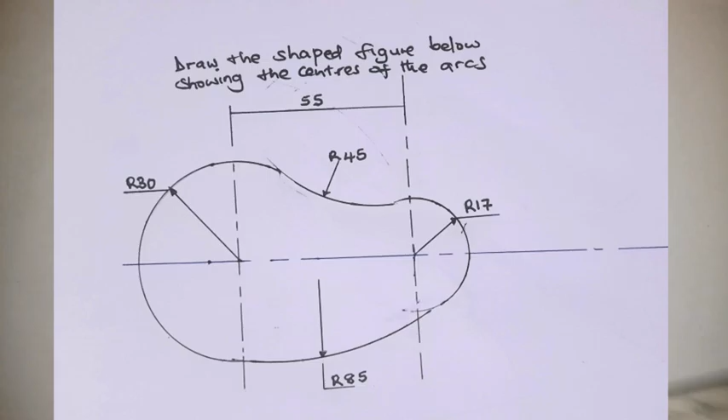So let's proceed. Let's have our center line, and from this center line we can establish our center point. Let's say this is my center point, and at that point we can draw the first semicircle. Before that, we have the vertical center line at the point where we want to put our center for the first semicircle. Let it pass through there. So the first one is there.

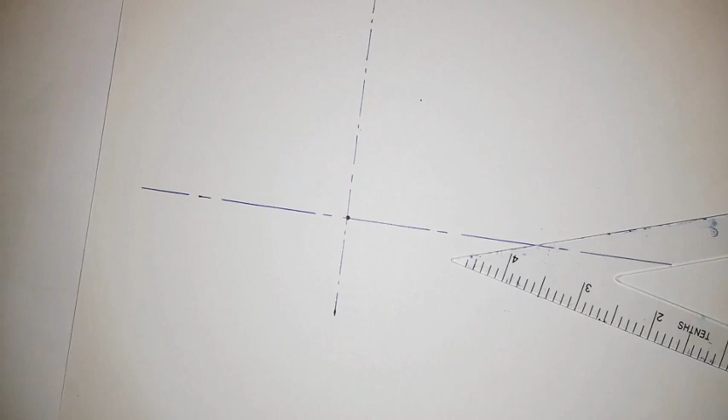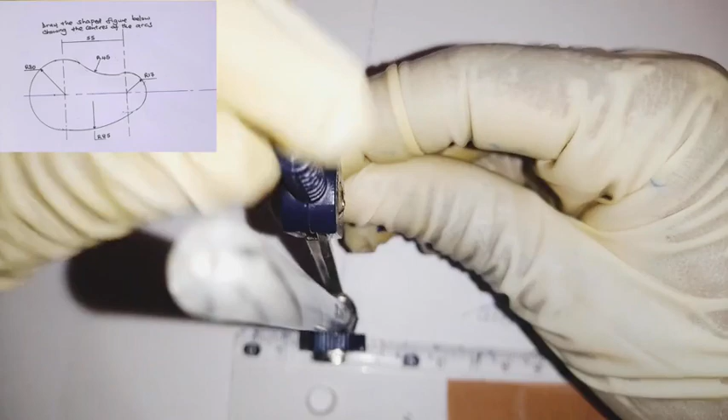Next we draw that semicircle whose radius is 30. We measure 30, and draw that semicircle so it can pass through the center line just a little bit.

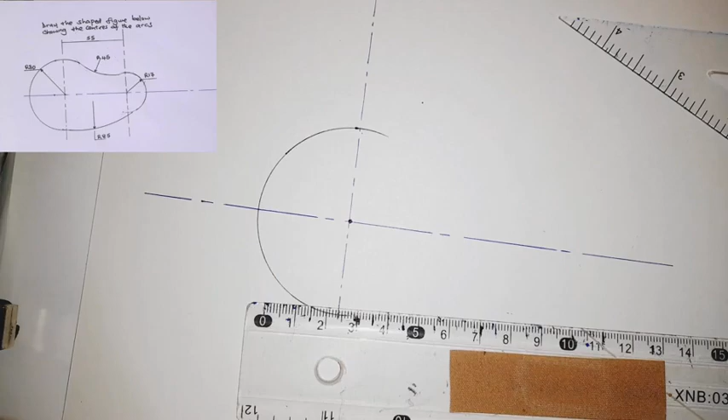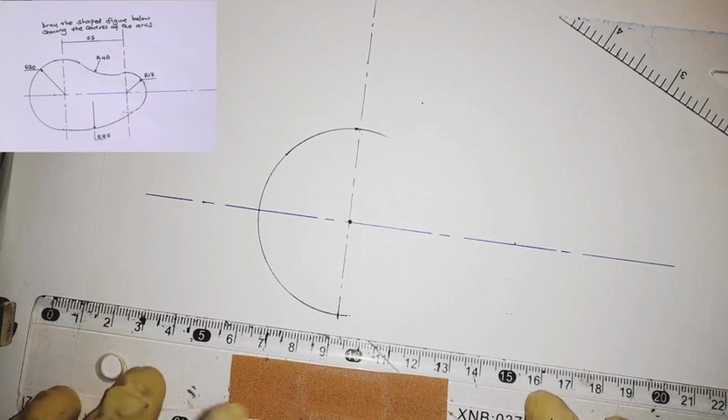Next we establish the center point for the second semicircle, which is at 55 millimeters away from this center, as given in the question. So we measure 55 from this center. At that point again we can have our center line. The distance between the two centers is 55, so we can have another one here.

Now once we have that, we can draw that semicircle whose radius is 17. Measure 17, and draw it.

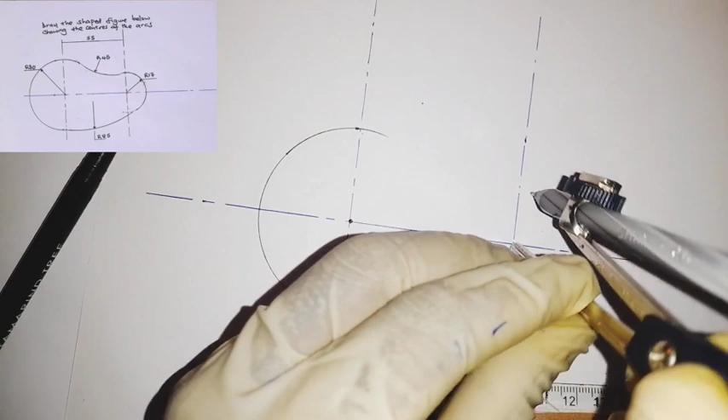There we are. The next thing is to identify the arcs that are going to touch these two semicircles, which one is external and which one is internal. Once we know that, we can apply the addition and subtraction principle. Let's look.

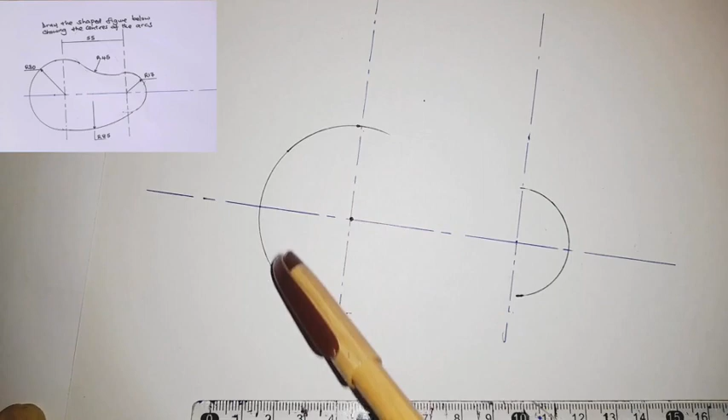This semicircle here is part of a circle, this one and this one. Let's assume you complete them so each is a full circle, and another one here. If we have another bigger circle whose circumference touches the two, it means all three circles touch each other externally. So this arc is an external arc.

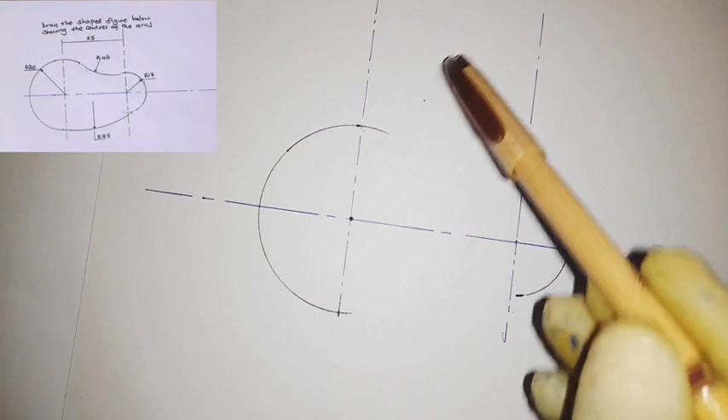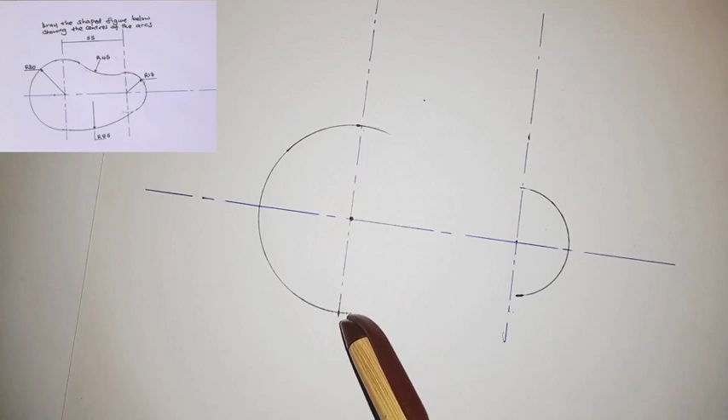Now let's assume again we complete this circle and this circle. We have another arc here with radius 85, which is bigger than the other two. If we complete these and have another circle with a larger radius touching the two circles in that manner, it means they're all touching internally, and therefore this arc becomes an internal arc. So how do we draw it?

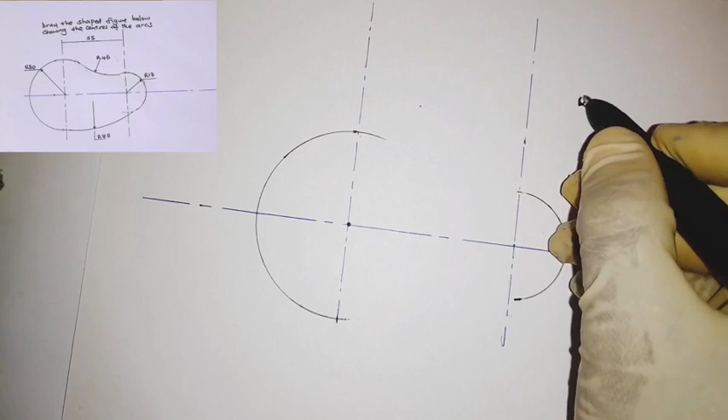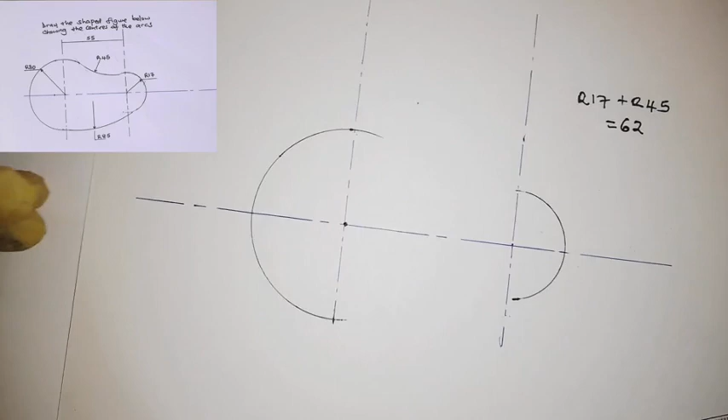First we start with the one touching externally. For the external arc, we add the radii, using the principle of addition. So we take radius 17 for the smaller one, plus radius 45. Radius 45 plus radius 17 gives us the answer 62. We take 62 from our measuring instruments.

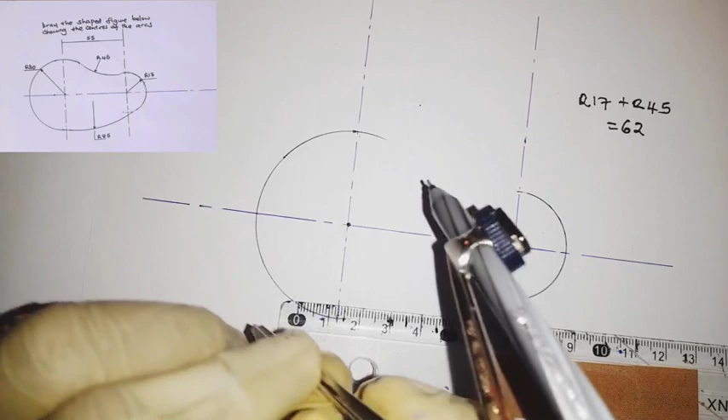Once you have your 62, come with it at that center and make an arc up here. We want to determine the center for that particular radius arc.

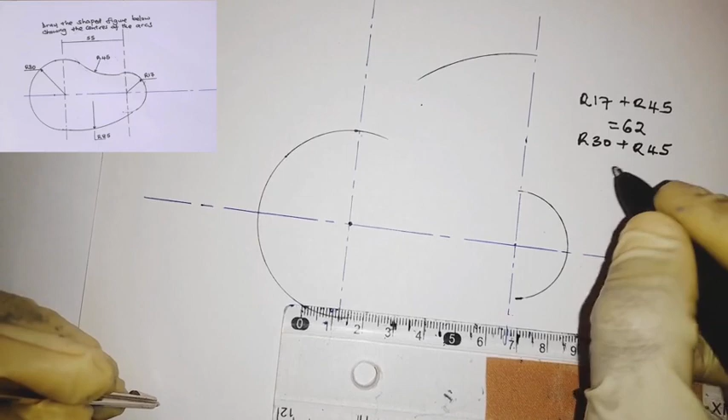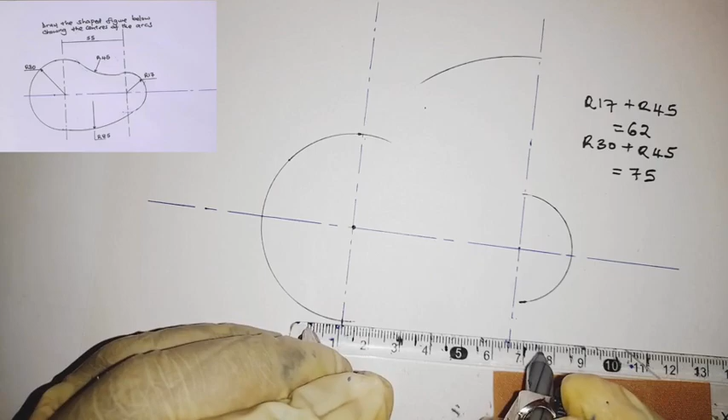Next we take radius 30 plus radius 45, and this gives me radius 75. That means 30 plus 45 gives 75. Again we measure 75. Once we have 75, we come with it at this center and cut this. This point of intersection for the two gives us the center for one of the arcs.

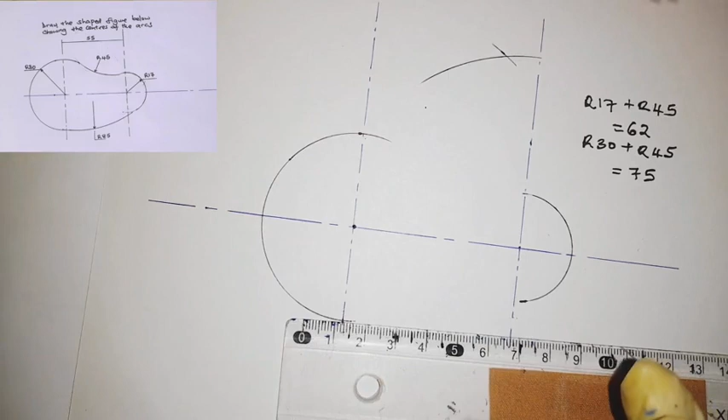So we can take now 45, the radius, come with it here at the center, and draw an arc that joins the two. There's some space left, so we can still elongate this so that space is filled.

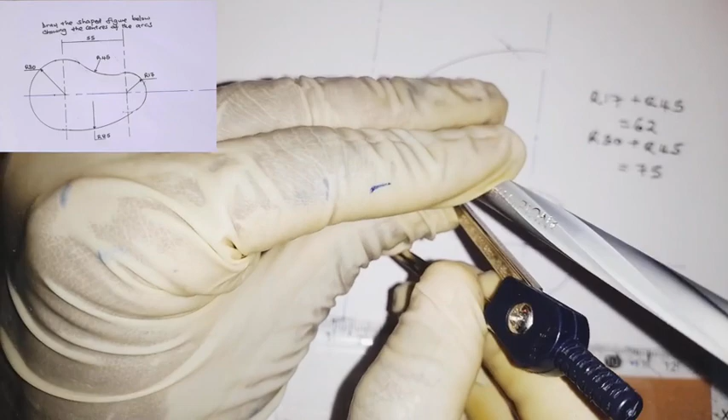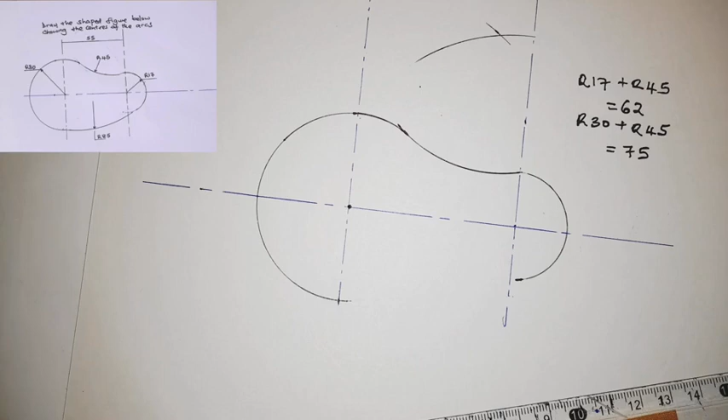Next we see how we can get the other one. For the upper and the lower one, we use the principle of subtraction because they are internal arcs. So now we take R85 minus R17, and this gives me 68. So I again measure 68.

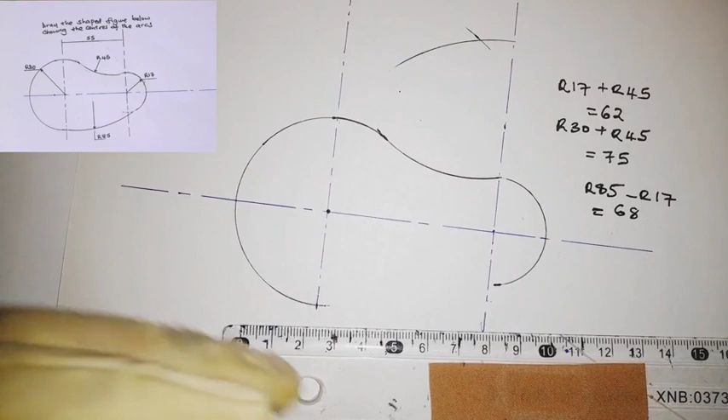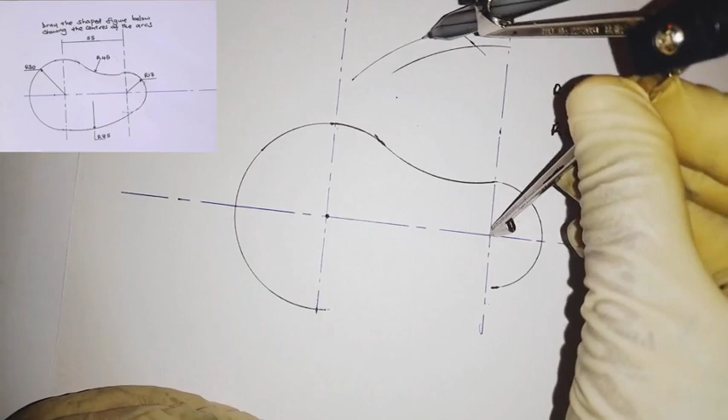This is 5, 6, 7, 8. With 68, we come with it here, then make an arc up here. Next is our R85 minus R30.

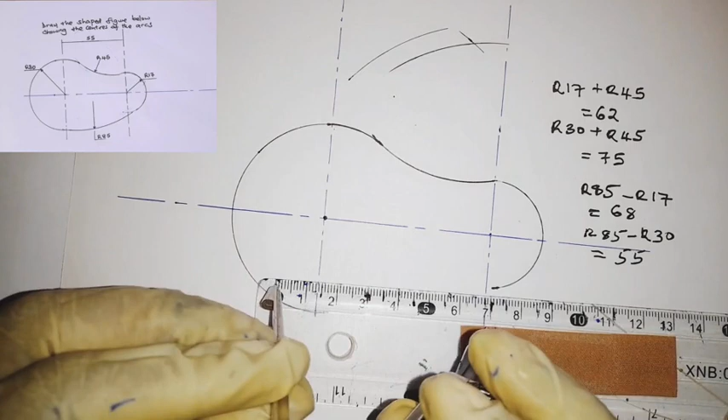R85 minus R30 gives us 55. So measure 55, and at this center we cross. This gives us the center for the next arc.

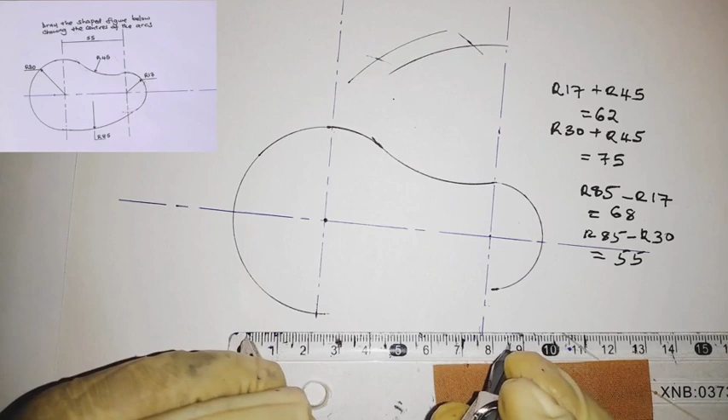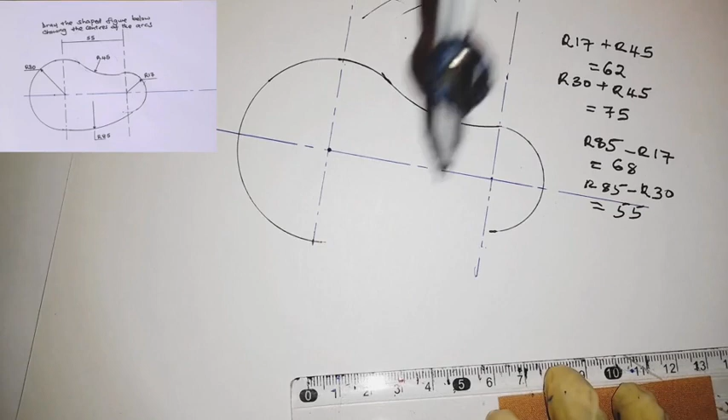This arc here is radius 85, so we measure 85, come with it at this point, then draw an arc that touches. Let's measure again at this point - sorry, it's 8.5. Come with it at this point and complete by joining the two.

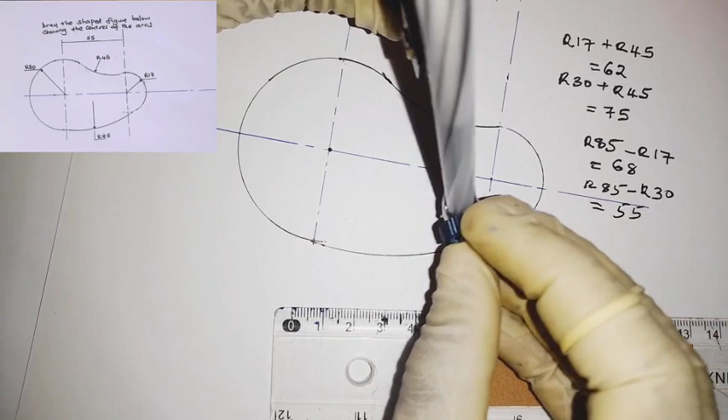So that's how we join the arcs for us to get the desired or required shaped object.